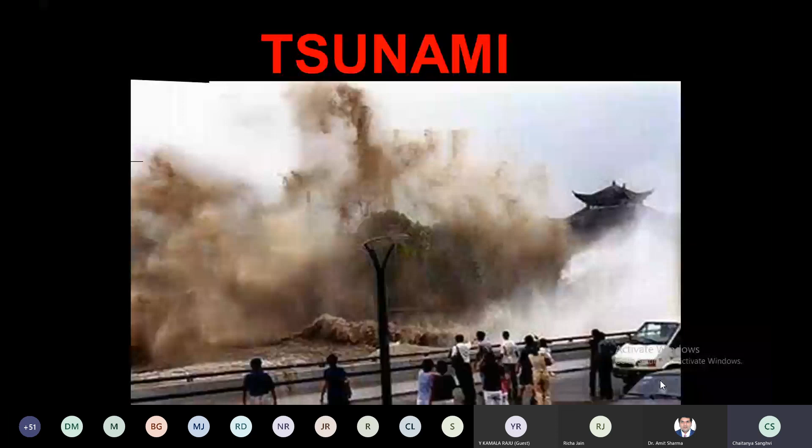This part is already covered in the first one, so I'm not going through this part. We say that earthquake is a man-made disaster, and we have to focus on our buildings. This is very important. Like in each and every earthquake, we see such kind of pictures, right? Deaths.

So these pictures will disturb you as a civil engineer. We don't want to see such kind of pictures. We might not be involved directly, but our civil engineering community is involved, so indirectly we are associated with this. And basically, as a civil engineer, we have to provide a safe habitat.

It's very important for us to provide safe housing or safe structures to all. If you look at the civil engineering profession, it is very unique. Compare our profession with the automobile industry, for example. In automobile industry, if one vehicle is put in the market, before that they conduct thousands of tests, and once they confirm safety and everything, they put that vehicle in the market. Against that, in civil engineering, our product, we put structures without testing. We test materials individually, everything is fine.

But as a whole, we generally never conduct any test on the structure most of the time. So we design our structure on the basis of our assumptions and theories, and then put our structures in reality. You have to feel proud that people are purchasing our houses, our structures. They have faith in you, faith that as a civil engineer, as a structural engineer, you are going to provide safe houses.

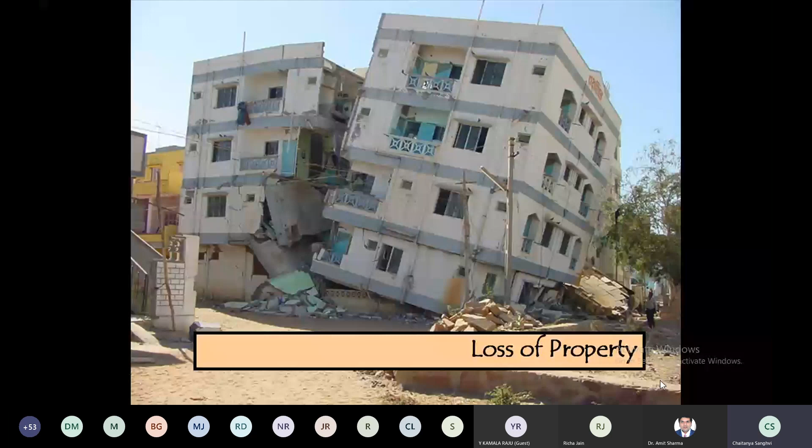No structure should collapse during an earthquake, that is the bottom line. But still, structures are collapsing. That's the reality. We see these structures collapsing, and such kind of pictures we have seen during earthquakes. Here, there's loss of a structural element, like this column is damaged. Right now, still the building survived because we have a lot of redundancy in the system, and the load of this column is transferred to the nearby column, which might help this structure to stand safe.

The health centers—I told you the hospital building in Bhuj was collapsed. These are the schools; almost 12,000 schools were damaged or collapsed during the Bhuj earthquake. 12,000, imagine. All of them were made up of prefabricated RCC units, and the joints were very weak. This was the reason behind it.

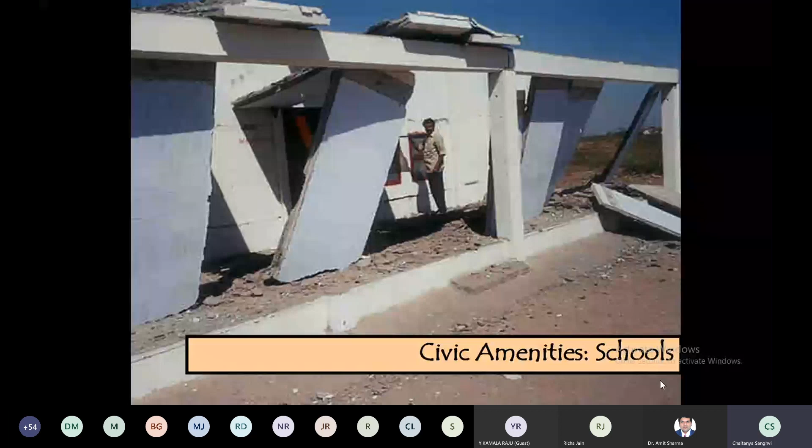The heritage structures are affected. Once a heritage structure is affected, it's very difficult to restore it, so this is a fault. Lifeline structures are affected, bridges or roads. If such things happen, it creates an obstruction in rescue and relief operations, and electric power generally goes down. Urban structures and industrial structures are affected, and the economic loss is very difficult to estimate.

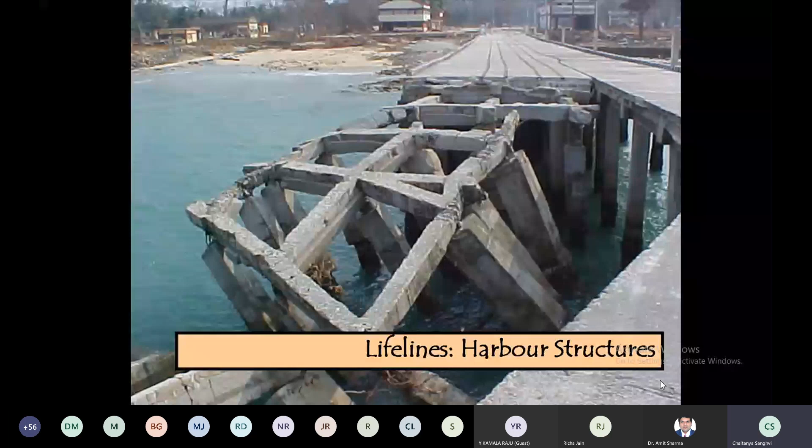We know that 59% of land in India is vulnerable to earthquakes, 8% to cyclones, and 5% to floods. We all know India is resting on the Indo-Australian plate, and the Indo-Australian plate is moving below the Eurasian plate. So the formation of the Himalaya is because of this interplate interaction, known as convergent boundaries. Earlier there was a sea instead of the Himalaya, and now there is a mountain because the two plates are coming close to each other, interacting.

One plate, the Indo-Australian plate, is going below the Eurasian plate, and therefore this is happening. This is a seismic zone map of India, and this is the epicentral map.

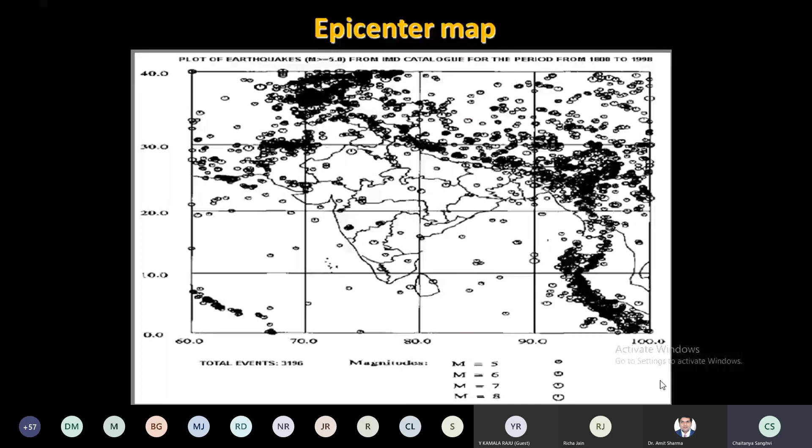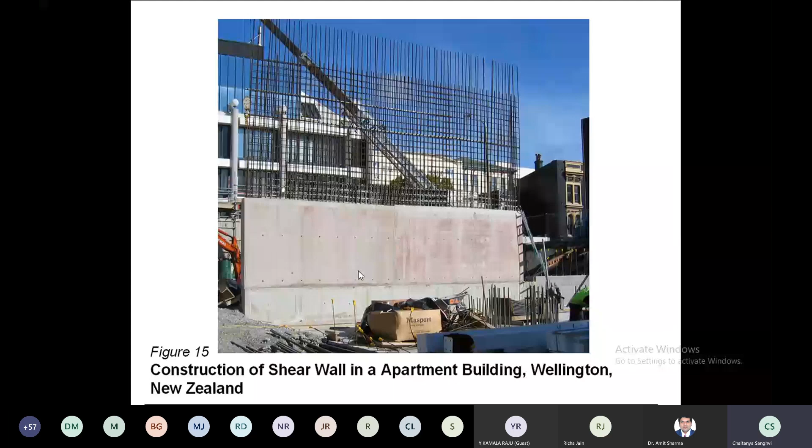This is the shear wall system. The shear wall construction is very easy. Before 2001, people were expecting that shear wall construction is difficult, but it's very easy to incorporate in our structures. You can see this is the MR frame with the shear walls. Generally the moment resisting frame with the shear wall is a good combination, and we have special resisting systems also.

Now we come to the main part. The main part is the need of an earthquake lab. First of all, why is the earthquake lab required? So we have to discuss many things here.

First of all, earthquake is basically a random ground motion, but it's very strong. And the response of your structure to this strong ground motion is also complex. Therefore, we go for static and dynamic analysis. We have a code provision IS 1893/2016 for this.

We have already discussed that earthquake forces are much higher than design forces, and therefore we follow the design philosophy that it is not earthquake proof, but earthquake resistant design.

Earthquake resistant design philosophy means damage is allowed but collapse is not allowed. And after each earthquake, you see there is a refinement in the codal provisions. I told you that IS 1893 part 6 is coming, which is related to base isolation techniques.

So for laboratory testing, we need a physical model and an earthquake simulation, and these two things are required to understand the behavior of structures. The shake table is one means of laboratory testing of the model.

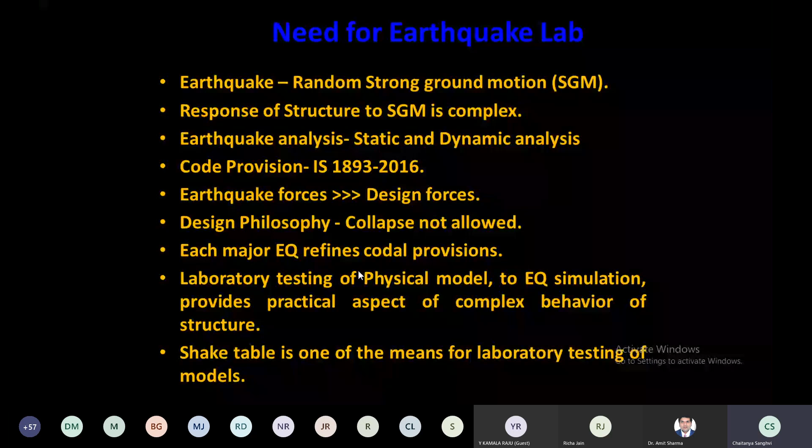Generally various tests are performed on the model. We talk about dynamic tests of models. There are free vibration tests. The free vibration test means giving an initial displacement.

We actually allow the displacement and then allow our structure to move. In the initial velocity test, we give an impact. Forced vibration test means shake table testing, resonance testing, everything comes under this. So we have different types of testing. Even ambient vibration test is also there.

As far as today's presentation is concerned, I'm not going in detail of all types of testing, but I will focus on free vibration test, resonance test, and shake table testing. This is what we are going to discuss today.

Now, to perform the dynamic test, we basically require three things. One is the equipment to provide dynamic force, that is the shake table. The shake table is generally used to provide earthquake motion, so it is also known as the earthquake simulator.

Second, we need a model of our structure, which may be a prototype, a scaled model, or an experimental model. Today we are going to discuss the experimental model. Third, when your structure is going to respond to the motion, we have to capture its response.

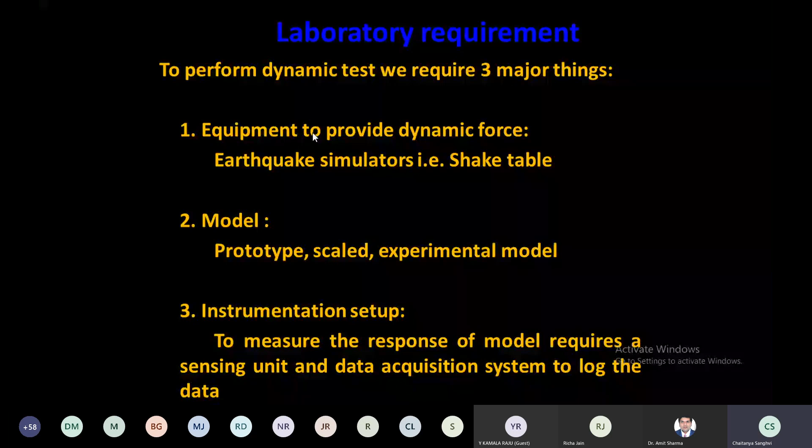So first we talk about the shake table. What is a shake table? The shake table is a laboratory equipment which is capable of reproducing the motion of the ground during an earthquake. This shake table is used to impart the earthquake motion.

It is basically a 6 degree of freedom shake table, which is the most suitable. We want a 6 degree of freedom shake table, meaning it is having shaking in two horizontal directions, vertical direction, as well as rotation in all three directions. So 6 degrees of freedom is required.

We are going to test prototype or scale models in the laboratory, and this shake table helps in investigating both responses, linear elastic or non-linear inelastic deformation. So here we go through certain shake tables which are available worldwide.

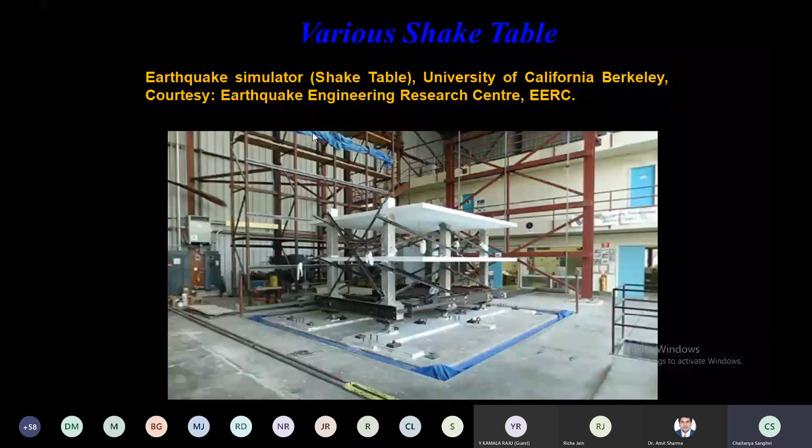If you look at this shake table from University of California Berkeley, the size is 20 feet by 20 feet, and payload capacity is almost 1 lakh pound. It is a servo hydraulic actuator controller, having 8 actuators in horizontal direction and 4 actuators in vertical direction. The maximum acceleration you can impart is 1.5 g.

So this is a 6 degree of freedom shake table. It is having 2 horizontal shaking components, 1 vertical component, and 3 rotations.

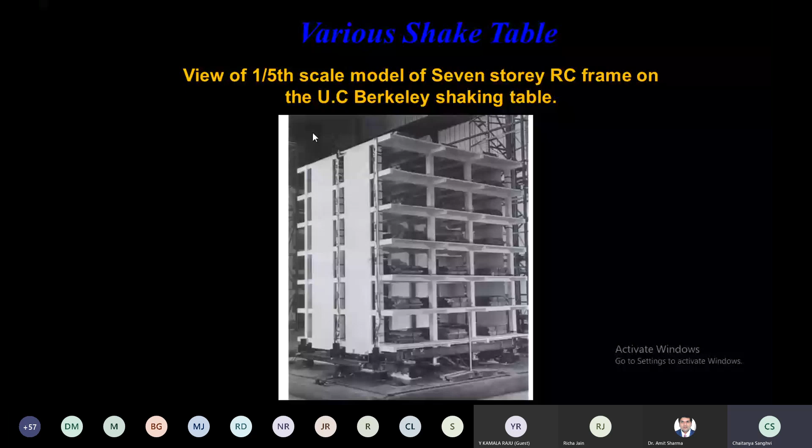So basically a 6 degree of freedom shake table is difficult to build, and the rotational component is important only in certain cases. Otherwise, if you neglect the rotational component, then 3 components remain: two horizontal components and one vertical component.

And I told you that the vertical component means there is shaking in the vertical direction. Now, when there is shaking in the vertical direction, it results in an increase in the axial force in the column. Now, when we design the column, we use a factor of safety of 1.5. So if the column is subjected to 100 kilonewton force, we are designing for 150. It means the column has a reserve strength of 50 kilonewton, and this reserve capacity will take care of the vertical component of the earthquake.

So the vertical component is not important if your structure is located away from the epicenter. What is the predominant action? It is horizontal. So what remains is the horizontal direction, and we require two components basically, in the x direction and in the y direction.

Now it means we have to develop a shake table which shakes the model in both directions. Instead of that, the code says that you test your model in one direction and then test in the other direction. So instead of a biaxial shake table, if you have a uniaxial shake table, you test your model in one direction, then change the orientation of the model and test in the other direction.

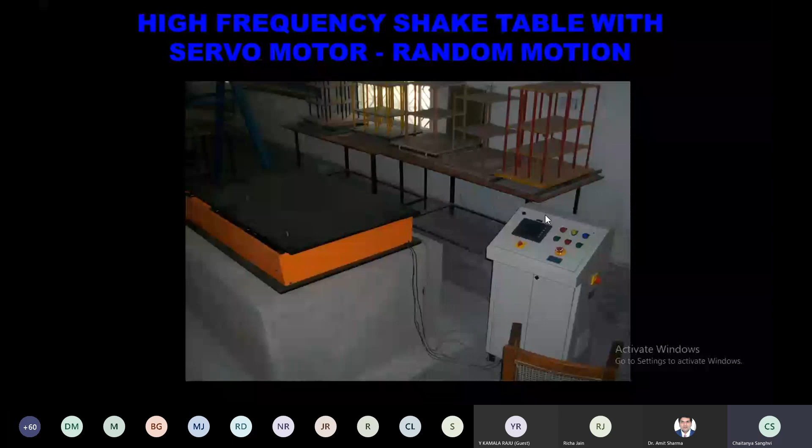So these are the various shake tables available in the lab. This is a uniaxial shake table, where the frequency range is 0 to 25 hertz, payload capacity is 500 kilonewton, and the displacement capacity is 260 mm. We have an instrumentation setup, this is the vibration analyzer, a 16 channel vibration analyzer, meaning you can acquire 16 data at a time.

It means if you put a sensor on one floor or one column, you get the acceleration of that particular column. So 16 records you can have at a time, right? You can record through sensors.

So we have a uniaxial accelerometer and a triaxial accelerometer. Uniaxial means it gives the acceleration in one direction. Triaxial, it will give the acceleration in all three directions.

So for a triaxial sensor, suppose if I'm talking about 16 channels, it means suppose I am having 10 uniaxial sensors, meaning I get 10 records, and I have 2 triaxial, meaning 6 records. So 16 channels will serve this purpose. Or you can have 3 triaxial, giving 9 responses, and the remaining 7 uniaxial sensors you can use as accelerometers to capture the response of your structure, right?

So the first part of the experiment is actually preparing a model. We are testing the model on the shake table. So therefore we have to determine the property of the model first. We have to determine the stiffness of the model. We perform the impact hammer test, free vibration test, and the shake table test. So this is what we are going to do as far as the laboratory experiment is concerned.

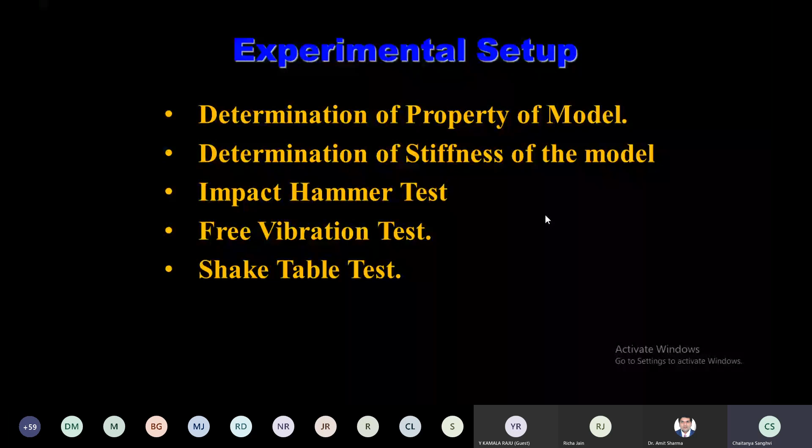Suppose this is a frame, right? Now this frame is a rigid frame. So what we do here, you can see this is a 2-story model. So this is a 2-story model, and what we are doing is locking one floor, and we apply the force here, at this level. And then we record the deformation, so we get the actual stiffness of the structure, right?

So what actually we do? We do like this. Basically, it's a 2-story structure, story 1 and story 2. So what we do here is apply the force on the first story, and we get the stiffness of the first story. Then we lock the first story and apply the load on the second story, and we get the stiffness of the second story, right?

Practically, we get this actual stiffness. This stiffness we are calculating in the laboratory, on ground. We are measuring this, right? So you get the exact idea what is the stiffness of your model. And you can also verify the stiffness with the theoretical calculation, and you can also have an idea of what the differences in the stiffnesses are and why the differences are there. So that is to be there.

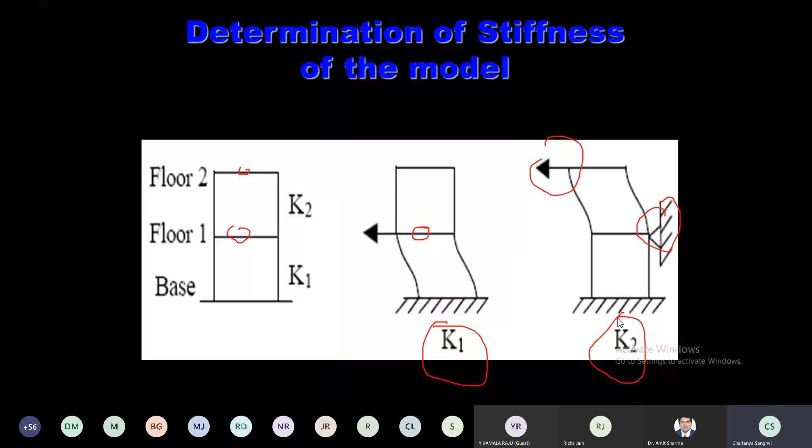So these are some of the things, and then basically we perform the free vibration test. What is a free vibration test? Basically, free vibration means your structure is there, and then we allow the displacement, and then we are leaving it. Now your structure is basically flexible, it possesses certain stiffness, certain flexibility. So suppose if I am stretching the structure and then relieving it, then the structure will vibrate. How will the structure vibrate? That we'll see in this video.

You can say whether it's visible or not. Yes, sir, you can see this. Is it visible? Yes, sir. Now you see this is basically a three-story model, and what you are doing is disturbing it, you are just stretching it, right? So now because your structure is flexible, it will vibrate.

Now you can see here, sensors are placed at every level. It will capture the acceleration of the slab, right? So we are capturing the response of our structure.

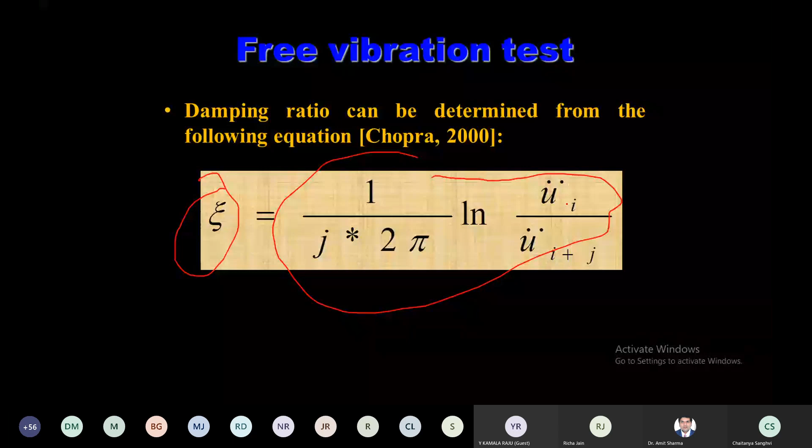So here, this is the expression in which we are calculating the amount of damping present. This is the equation given in the book of A.K. Chopra, and we can refer to this to calculate the damping. So again, one more time we will see the video and you get a clear idea of what exactly we are doing. It's a free vibration test. Free vibration test means only initial disturbance is there, and later on we are not disturbing the system. This is a sensor.

This is on the top. It is a sensor, right? The sensor is placed, and it will measure the acceleration in the direction. So sensors are placed on the shake table on all the floors.

So when we disturb the system, we are applying only displacement and relieving. So it is a free vibration test. What is the free vibration test? Only initial disturbance is there, and then the system will vibrate on its own elastic property, right?

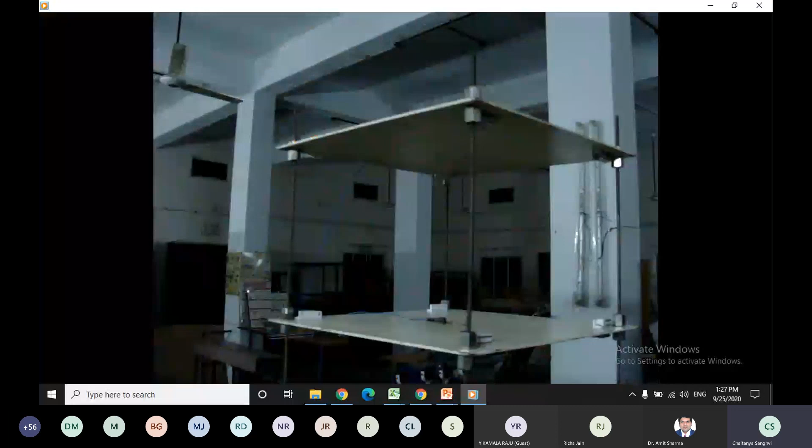So this is the free vibration test we are going to perform. The second is the impact hammer test. The impact hammer test means it is the initial velocity test. Initial velocity. You see, this is basically an impact hammer.

This is the hammer, right? And on the tip here the sensor is there. This is the sensor, right? Now this you can connect with the wire here. You can connect here, right? So when you apply the impact using this hammer, then the sensor will sense how much energy you have applied.

It is recorded by this hammer, and we apply this energy to our model, then the model will vibrate. So it is known as an impact hammer test, right?

So you can see here, this is a hammer, and here the impact is given. And you see, this impact is very minor, right? And even though it is minor, our sensors are sensitive, so they will capture all the data, right?

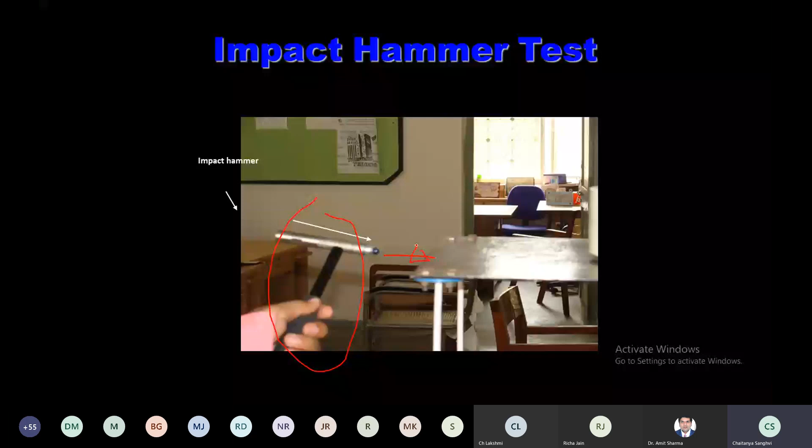And you can see here how we perform the impact hammer test. Now this is the simple model, and the impact is given. Now you can see this spring mass system is vibrating, right? So this data is captured in the software.

This is the impact given, this is the energy given. At the same time, the corresponding displacement is observed. If you apply more energy, then...

Again, I'm repeating this impact hammer test. If you apply more energy, then the response will be larger. That's all, right? So this way we are performing the impact hammer test.

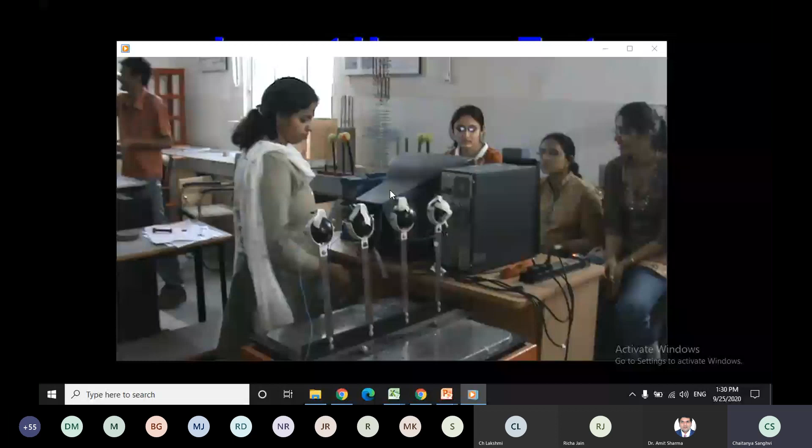This is known as the initial velocity test. Earlier it was the initial displacement test, now it is the initial velocity test. Both are free vibration tests. We are only going for the initial displacement or initial velocity, that's all. So only initial disturbance is there, that's why it is known as a free vibration test.

So the difference between free vibration and forced vibration is: in free vibration only initial disturbance is there. In forced vibration, during vibration we are continuously disturbing, we are applying energy. That is the forced vibration test. So here we are not performing forced vibration, this is the free vibration test.

Now we go to the third test, the shake table test. Here we are mounting our models on a shake table, and the shake table will be applied the motion, and then we record the response of our structure. We determine the natural frequency of vibration, acceleration, and natural period, everything from the frequency response curve, right?

So now we go to the single story building, right? Single story building means this is a single story building having a single slab. The single slab has a very heavy mass at one location. So if the earthquake force acts in the horizontal direction, a heavy mass is located here at this slab level, right?

Heavy mass is there because the slab is very heavy. And what is earthquake force? Earthquake force is mass into acceleration. As it is mass into acceleration, it generates a large force at this particular level. We know masses are present elsewhere too, but they are negligible compared to the mass of the slab. So we say it is a single story building having a single degree of freedom system, where this heavy mass vibrates in the horizontal direction.

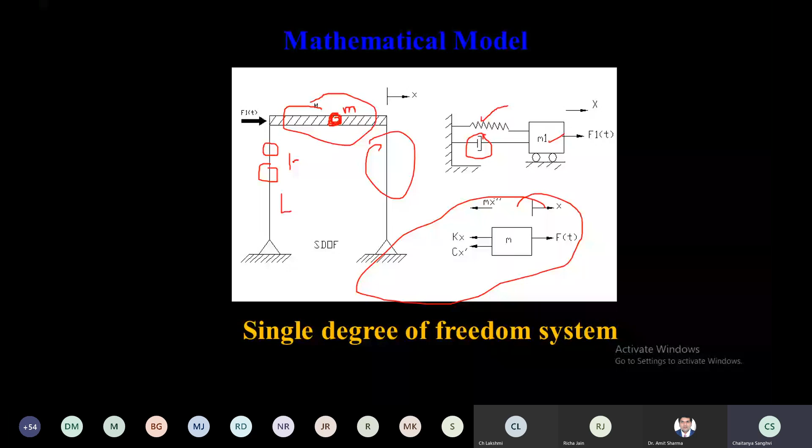And the fourth parameter is the mass. So basically we have prepared different models to understand the behavior. The most basic model is the spring mass model. We say this is the slab where the heavy mass is located, supported on columns. The column has certain stiffness, so we say it has certain stiffness and certain mass.

So which parameters do we have to consider? We consider that the value of E will change if we use a different material, because frequency depends on K and M, and K depends on E, I, and L. So if we vary E, I, L, or mass, we can vary these four parameters, and we try to study one by one what happens if we change each parameter.

So we are changing these parameters. We change the material, so here we're talking about E. What is the effect of E? Then if we change the height, that means L is changing here, and what is the effect on response? Here we are talking about a change in the mass. Here we talk about the thickness, meaning we are talking about the value of I, changing the value of I.

You can correlate: suppose I'm talking about a masonry structure, the value of E is different. If I'm talking about an RCC structure, the value of E is different. So which type of structure are we talking about? E will change accordingly. Height: suppose my drawing room has double height and the remaining rooms have single height. If double height is there, the behavior of that column is different compared to the single height column, because the stiffness will change.

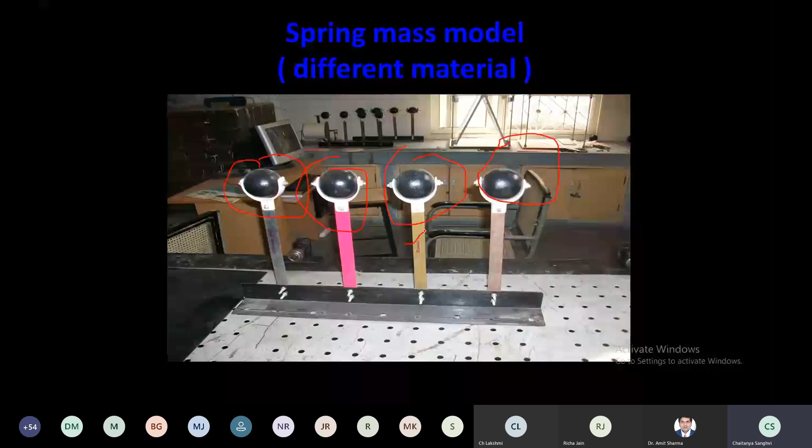So then we perform a free vibration test. When we perform a free vibration test, you get the result. When you perform a shake table test, you get the difference, right? So we have to perform all the tests. First, we perform a free vibration test, displacement test. Then we go for the impact hammer test. Then we perform the shake table test.

So we can have a stainless steel, we have a flexi ply, right? So here we can see the spring mass system. You see what we are doing? We are putting all the four models on a single shake table, right?

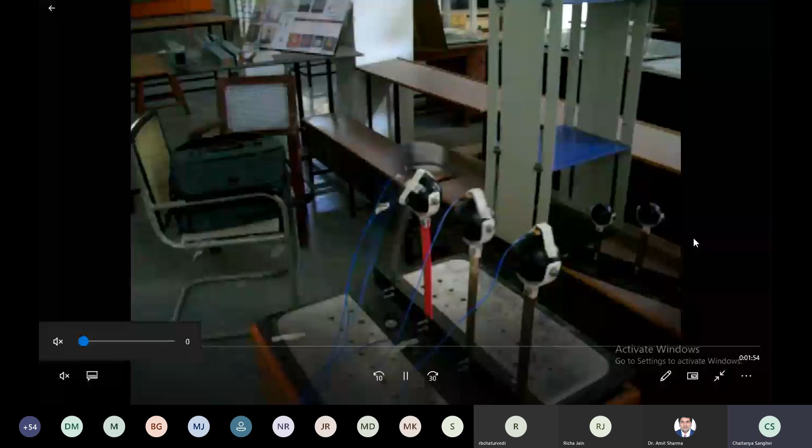Now here you can see there are basically four spring mass models. One is with steel, another is flexi ply. Now we apply a certain frequency.

Now you see all 4 models are given the same frequency, but one is vibrating more. Now the frequency is increased. When the frequency is increased, what is happening? Look at the behavior. The next model is vibrating, right? It means the frequency of this model is higher than the previous one, and it is vibrating.

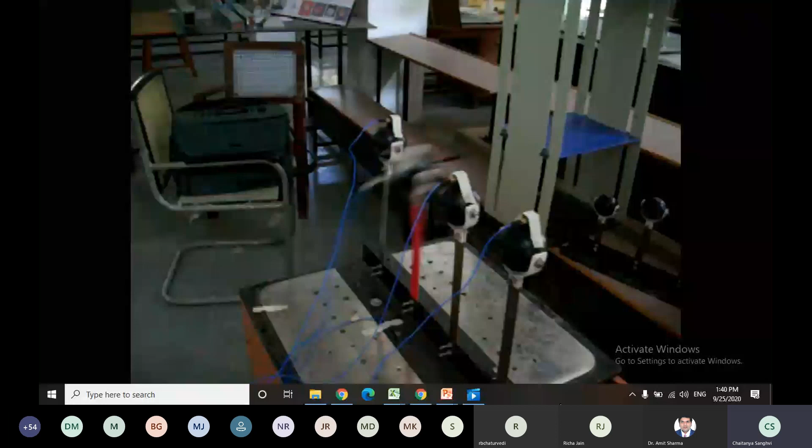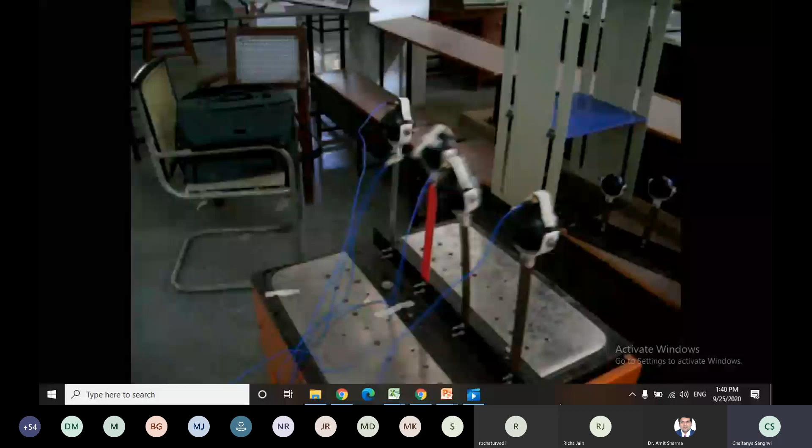Then if you are still increasing the shaking frequency, you see what happens. When we increase the frequency, the other 3 are not responding, but the third one is responding. First, second, and fourth are not responding, but the third one is responding, right? It means the frequency of this model is close to the frequency of shaking. So this is the reason for resonance.

And here the sensors are placed. You see, the sensor is on the top. A uniaxial sensor is there on top, and it measures the acceleration.

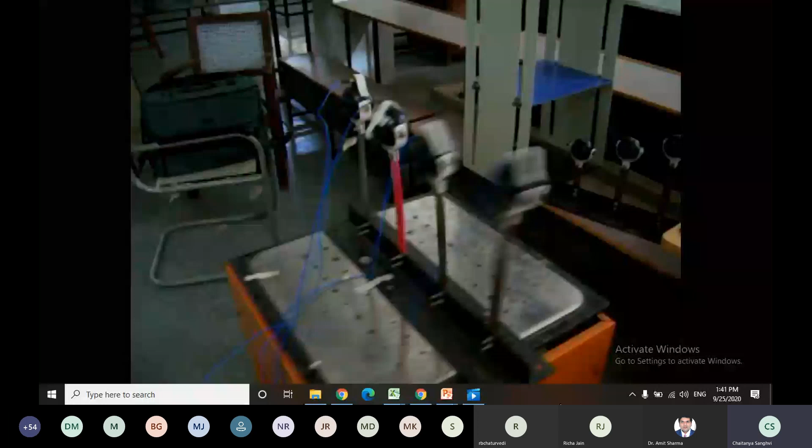Now still I am increasing the frequency. Just look at this again. If I increase the frequency, what is happening? Now the first 3 are not responding, the last one is responding, right? It means the frequency is close to this particular model.

So sometimes the question will arise, which building will be affected during an earthquake. You cannot say which building will be affected. It depends on the frequency of your structure and the frequency carried by the earthquake. This is very important. If a structure has a frequency of 5 hertz, and the earthquake carries 5 hertz frequency, that structure will vibrate more. But if the earthquake carries 10 hertz frequency, then 5 hertz structures will not be affected. So you can only say your structure will be affected based on the frequency of your structure as well as the frequency of the earthquake shaking. If both match, a larger response will occur.

So here, this is the spring mass model we can have. This is a basic model where you can study the response.

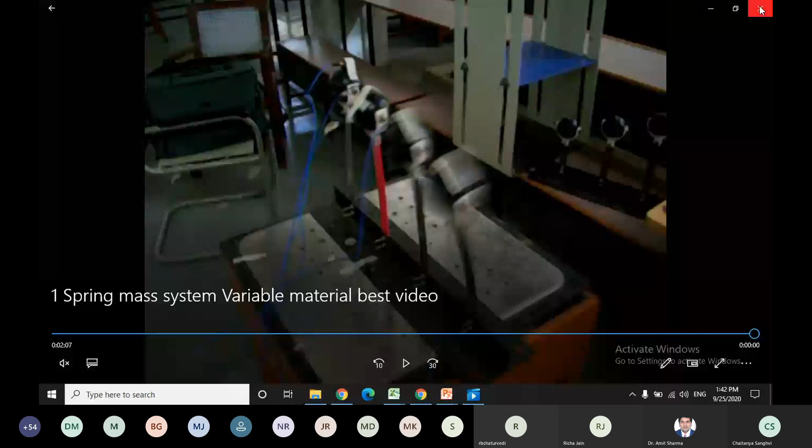So what exactly do we do? We have mild steel, stainless steel, flexi ply, brass specimens, and we use a vibration analyzer to test them.

We calculate the frequency. What is the frequency for mild steel? When we model this in STAAD software, we got 3.181, and theoretically it was 3.4. You can see these frequencies are close enough. This variation may be because of the end condition and other factors.

If you look at the stainless steel, and perform the experiment correctly, you get 1.15. When we model this in STAAD, it is 1.5, and theoretically it is 1.52. I know the mass, stiffness, all the geometric and material data, so I can calculate it theoretically also.

So you can compare this, and then you have proper satisfaction that what I have tested is correct and it matches with the theoretical values.

Then the next model is variable height. Sometimes we say my column height is 10 feet, for example. Or you can say the height of the column is 12 feet, 15 feet, or 20 feet, something like this.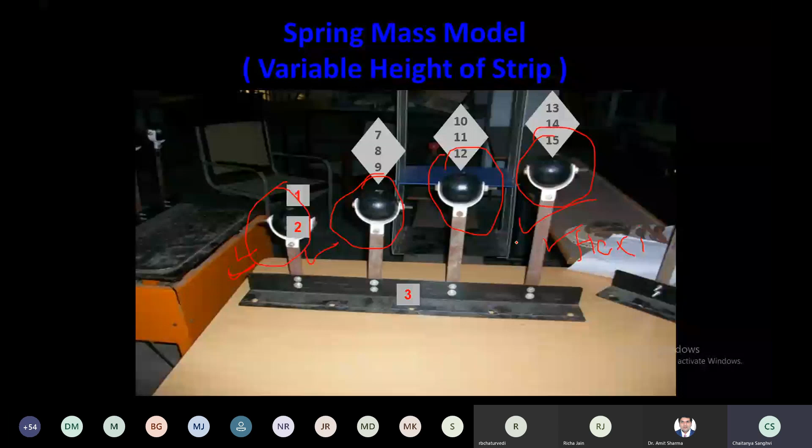Again you can do the same thing: analyzer testing results, then STAAD and theoretical comparison. Almost you get the same type of results, if we perform it correctly.

Then we have different masses, you can see here. This one has the least mass. Then a collar is attached here, and mass is added. Then mass is added here again, so this one has the maximum mass, while this one has the least mass.

So what is the frequency? Frequency is the square root of k by m. If this one has the least mass, frequency is high, and this one has higher mass, so frequency is less. This is what you can conclude.

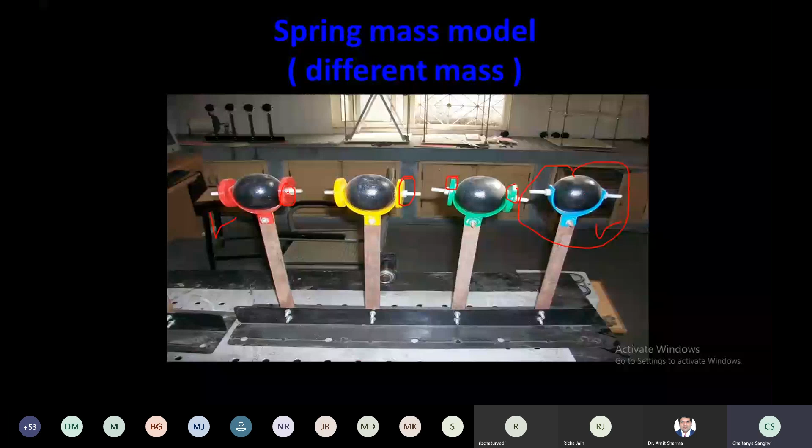Again the same thing can be performed for a spring mass model of variable thickness. So we can perform the test.

Now we go to the next part. Here we are talking about a multi-story building having three floors, 1, 2, and 3. So there is a 3-story structure. It means it is like this: this is the first floor, second floor, and this is the third floor.

So we have 3 floors, and again we test on the shake table. What is going to happen? When we model it in the software, we get different mode shapes.

Mode shape means for a certain lowest frequency we get this type of shape, then for a higher frequency we get this shape, and for the next higher frequency we get this shape. These shapes are known as mode shapes.

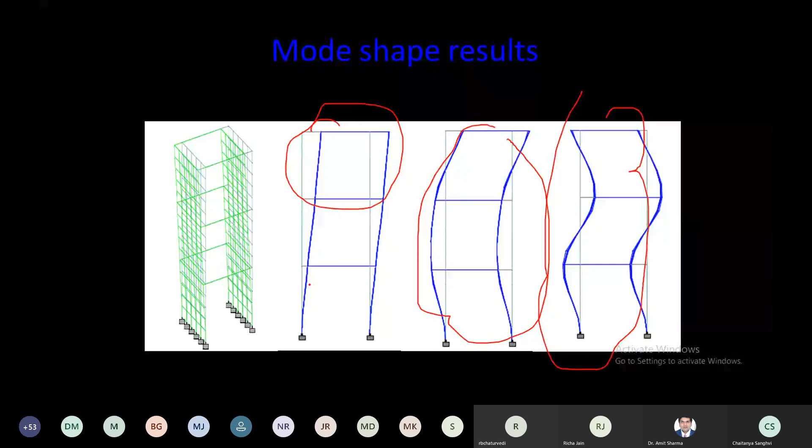You can see here, we will perform the test here, and here we have the lowest frequency. Remember, this is having the lowest frequency. Then here you have higher frequency, and here you have the highest frequency.

So when we perform a test on the shake table, what happens? You can see it is quite a flexible system. We put a sensor at the top, all 3 levels, and at the bottom on the shake table. You can see the shape is something different at lower frequency. Now, when the frequency is increased, the shape is changed. So the response of your structure depends on which type of shaking frequency the building is subjected to.

Now you can see the response has quite subsided. Let me repeat, just look at the model again. Here the lowest frequency is applied as the shaking frequency, and you can see the response. This is quite flexible, so the response is very high.

Now if I increase the frequency, what happens? The frequency of the structure and the frequency of the table are not matching, so the response comes down. Let me repeat this, you have to understand this.

What is resonance? This is a low frequency model. So when I'm testing this at the lowest frequency, you have a larger response. It means it comes into resonance.

And when I increase the frequency, then it crosses the frequency of the structure. So now the response is reduced, right? So therefore you have to be very careful.

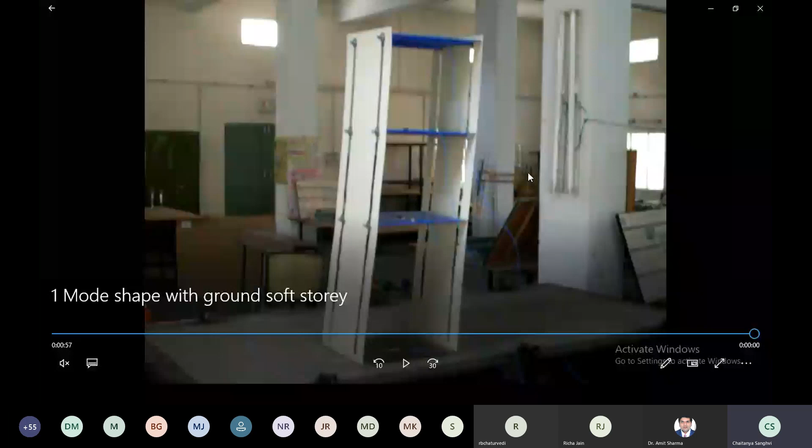You see, when we're talking about low-rise structures, the frequency is high, and when we're talking about high-rise structures, the frequency is less, right? When you calculate the frequency of a low-rise structure, it is always high, and the frequency of a high-rise structure is always low. Now, when a low frequency earthquake comes, then the high-rise structure will be affected, and when a high frequency earthquake comes, then the low-rise building will be affected. You cannot simply say the high-rise structure will be affected, right? You get my point, what I'm saying? Yes or no?

Yes, sir. So again, the response of your structure depends on what frequency the earthquake carries, right? If the earthquake carries the frequency that your structure is having, then a larger response will be there.

So that's why I'm saying that during the 2001 Bhuj earthquake, in Ahmedabad, 128 buildings which were ground plus 4 story collapsed, and only 2 buildings which were ground plus 10 story collapsed. Now the question will arise, why is this happening? There are many reasons, quality of construction and many other issues, but one of the reasons was the frequency of the earthquake was little close to the ground plus 4 story structure as compared to the ground plus 10 story structure. I'm not saying resonance was there - no, resonance was not there, frequency is continuously changing - but the frequency was a little close to the ground plus 4 story structure, right?

I'm giving you the example of the 1985 Mexico City earthquake. What happened? A very low frequency earthquake was there, very low frequency earthquake. And in Mexico, almost 7 to 15 story buildings were affected a lot. And when engineers analyzed why this 7 to 15 story range was affected - because it was a very low frequency earthquake - and why these buildings were affected...

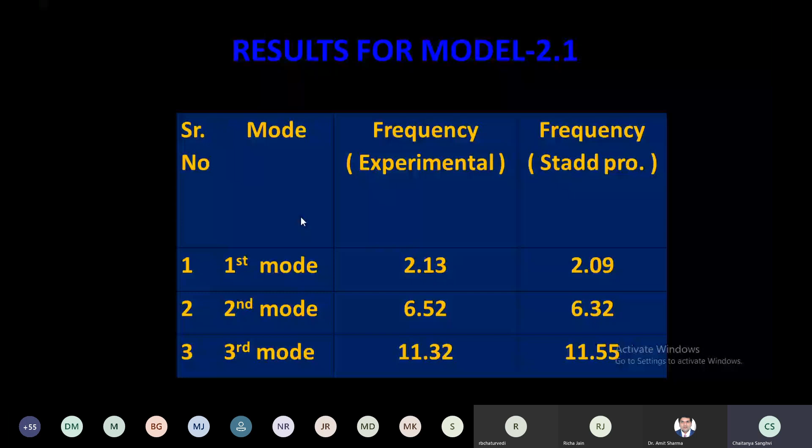Now, this is some dynamics part we have discussed, but now let's talk about reality. We are talking about structures which are collapsing during the earthquake, maybe open ground story or soft story structures, with vertical irregularity and stiffness irregularities. We will see this.

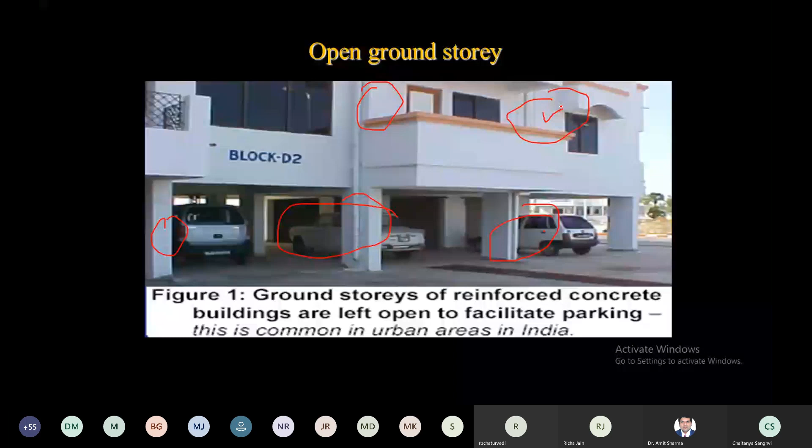What is open ground story? We generally provide parking at the ground story, and the people start living on the first floor. So what is happening on the ground story? You have only columns, while on the first story you have columns plus walls. So which part is stiff? The ground floor is flexible, and the first story is stiff. Here you can see only columns are there on the ground story, but on the first story you have columns plus walls.

Again you can see, this is generally the system we provide in India: a ground story where only columns are there, and on the first story you have walls also. So the ground story is flexible, upper story is stiff. The soft story means the story whose stiffness is less than the upper story—it is known as the soft story. In the previous code, it was mentioned that if the stiffness of any story is less than 70% of the stiffness of the upper story, it is a soft story. It was defined before, but now in the new code it was removed.

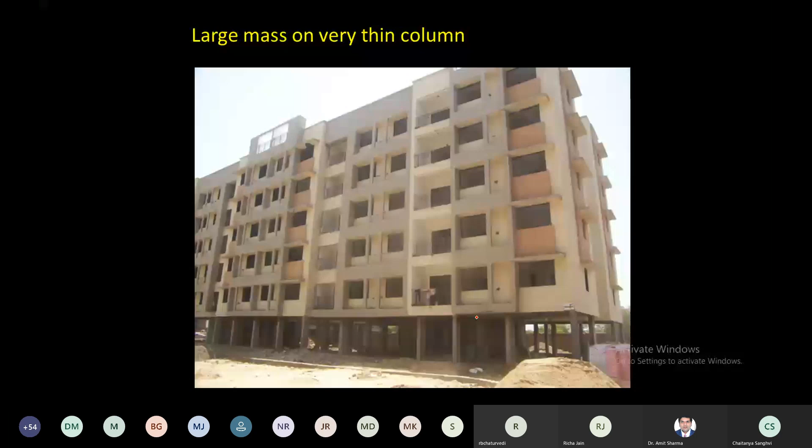Here again you can see these are soft stories. Now here you have car parking, the space for car parking is there. This is a ground story meant for parking only. So what is going to happen? Here the ground story is flexible—maximum deformation is on the ground story, and the upper portion is very stiff, so it moves as a whole. So the whole building behaves as an inverted pendulum. We can say this mass is a single mass vibrating on these columns.

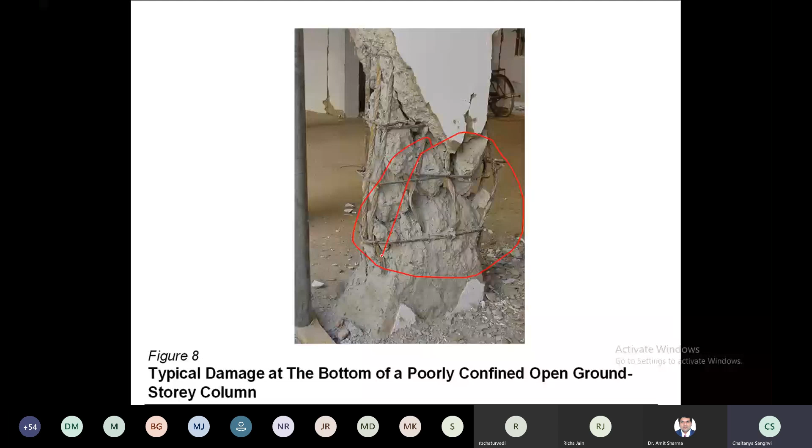Because it is soft, you can see what is happening here, because of this reason. Here we have 128 buildings, ground plus 4-story, collapsed. Out of these, almost 90% of buildings collapsed due to this soft story effect, because of the parking on the ground story. You can see these columns collapsed on the ground story, but the upper part, as such, has no damage—damage is there, but because of collapse of the lower story. Ground floor columns collapsed, but almost nothing happened to the upper part. So we have to pay more attention to such kind of problems.

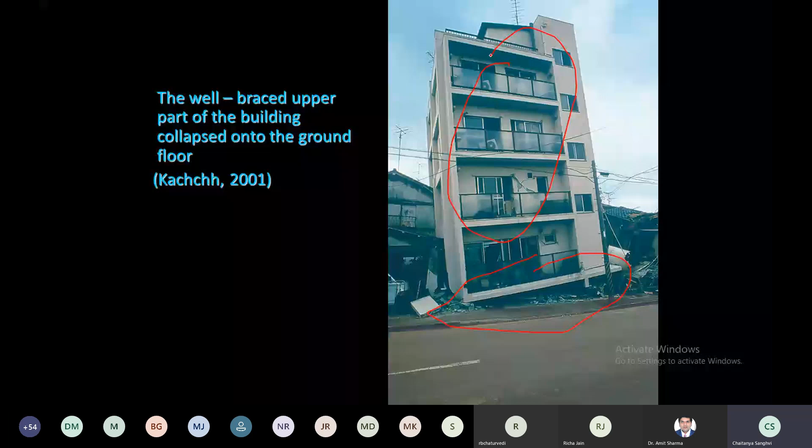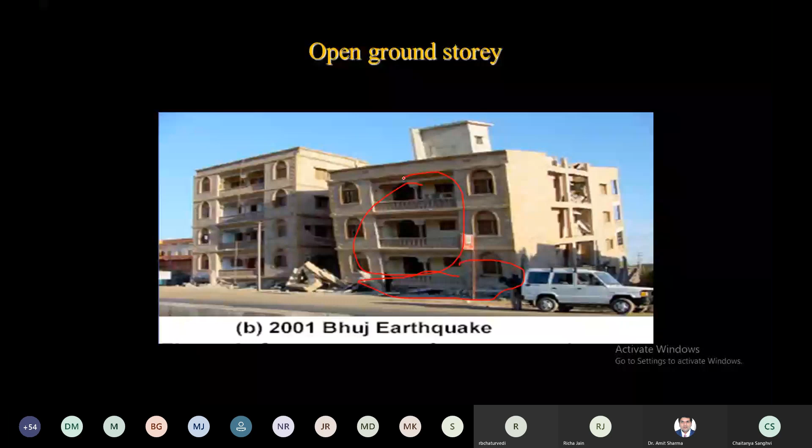So now we will see what is the soft story effect.

I think the orientation is something wrong. Orientation is... how to make it a 90-degree rotation? Is anybody doing it?

Sir, yes, I think the video is taken with the help of a mobile. How to see? Okay, I think this video...

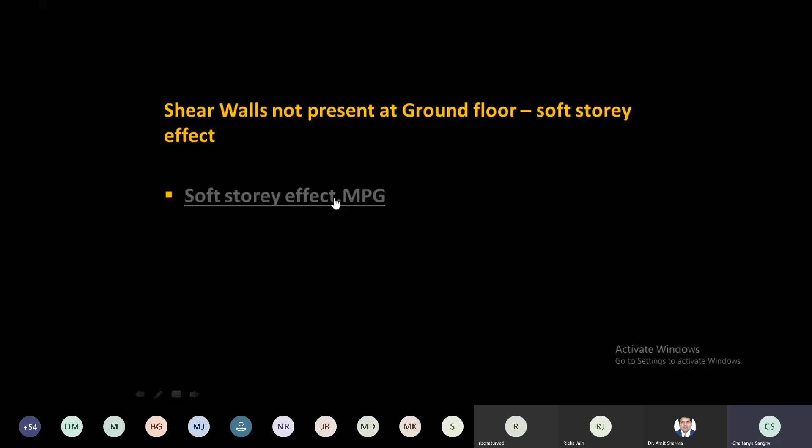If you can see, just look at this. You see the ground here. On the ground story there is no wall, and here you can see wall is there. So it is like an open ground story structure, right? And now what is the behavior? You can see the upper part is moved as a rigid body, and the lower part where the deformation is there.

I think the next video will be more. I'm not able to rotate it right now, that is a problem. Rotation is possible, but I think options are not here right now.

Okay, we are not wasting time in that, but I think the next video is the soft storey failure. Now you observe this, this is very important. You see, again, here the walls are there. On the ground story there is no wall, right? Just look at this, and here the students are also very excited. Look at this, here you can see the failure also. So this is a soft storey model.

And we are applying the shaking frequency. Now you look at the upper part, it is moving as a rigid body, and the deformation is at the ground story, right?

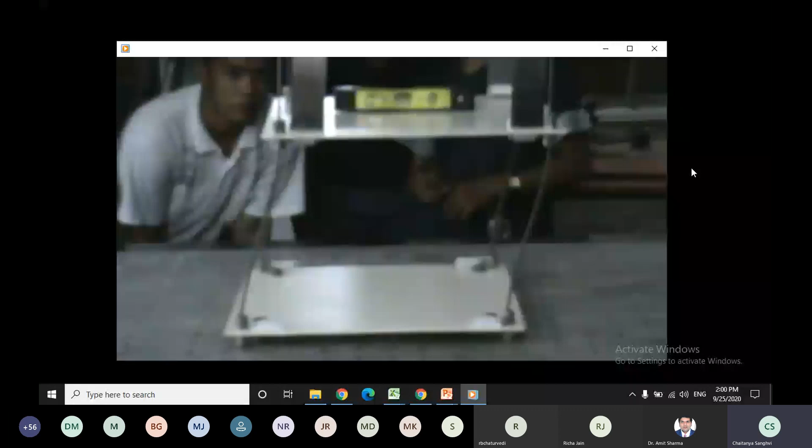Look at carefully, look at carefully now. Right, upper part is moving like a rigid body, and in the ground story, what is happening? On the ground story, yes, larger deformation, and this is gone. You can see this is collapsed, right? This is broken, right? So this is the soft storey failure, and a lot of energy. When you touch this part, I think a lot of heat is generated.

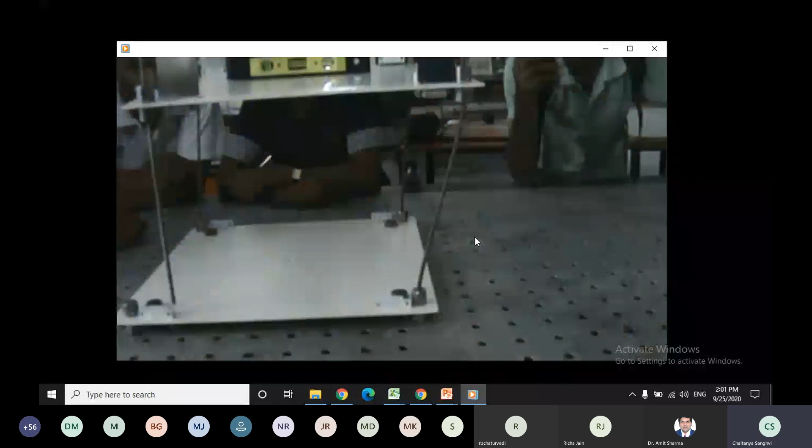It is too hot, right? The same thing is happening with the other structures also. You see the deformation is observed in the ground story. So my request is that avoid the soft storey, avoid the parking, if you want to go for it, with the proper design considerations, right? So that is to be required.

Okay, again, I think you have to see it again so you can appreciate the soft storey, because 90% of buildings in the Bhuj earthquake collapsed due to this reason, right? And in India we are still following this practice without proper design considerations. If the proper design considerations are there, fine, nothing is wrong, you can also design such kind of structures, but you have to pay attention to it, that is required.

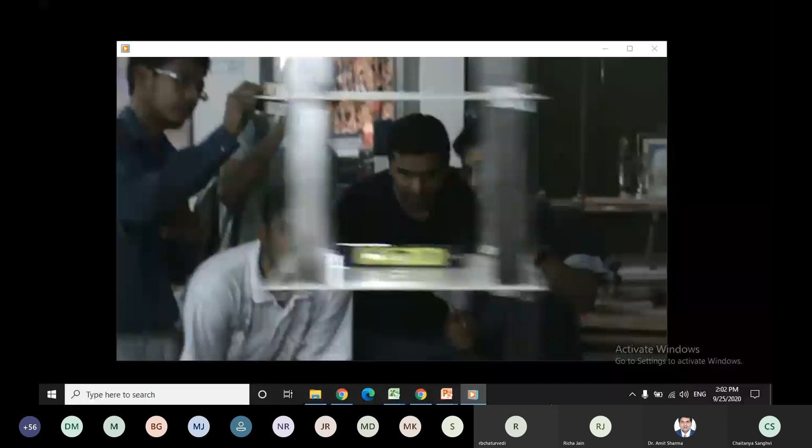Look at this, right? Larger deformation on the ground story. Upper story, almost no deformation, because of stiffness, high stiffness. Now look at the failure. Look at the failure now. Look at the failure, larger deformation, and it is gone, right? So I think this is sufficient.

Okay, so we move ahead with the next part. So here you can see we have calculated the peak acceleration, displacement.

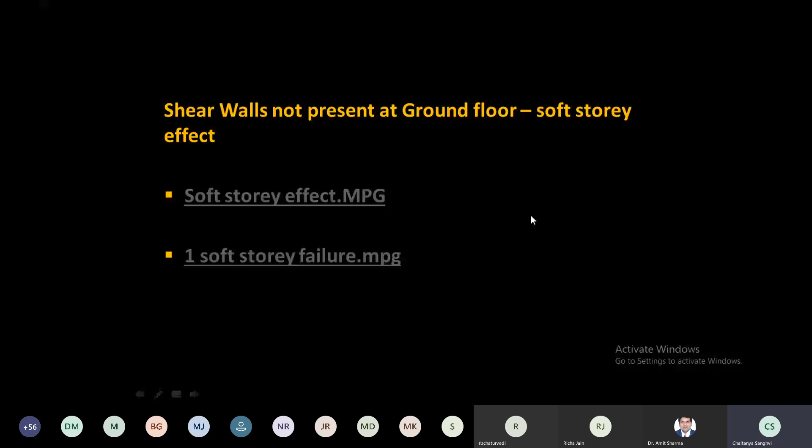So displacements are very high, and you see our concrete structures, our steel structures have limited deformability. If it deforms more than a certain limit, it will collapse.

We sometimes have the middle story to be soft. Middle story means, sometimes we need an auditorium on the 6th floor, so for the auditorium we remove the column. What happens? Almighty nature has found out the weakness within 2 minutes. 2 minutes, the weakness is found out, and the whole structure came down, right? You can see here, this is...

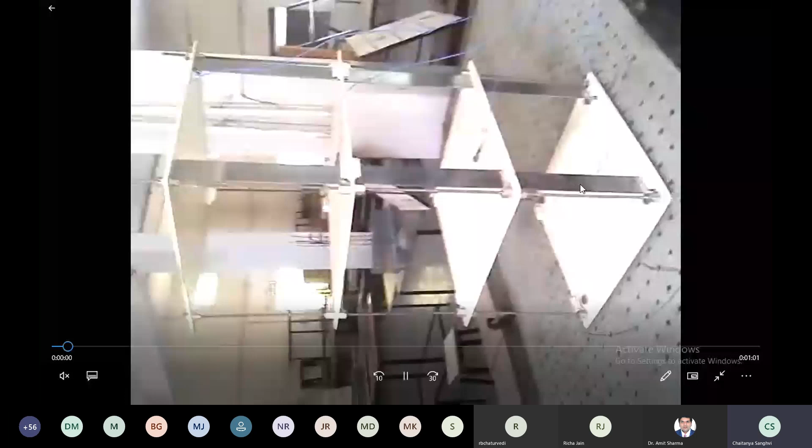So when you go for the asymmetric shear wall, asymmetric means we are providing a shear wall on one side, right? Generally what is happening, when you are a structural engineer, a civil engineer, you know that we have to deal with the architect, and architects are saying that the front part of the structure should look good, and therefore you cannot provide a shear wall in the front. You can provide the shear wall on the back side, right? So we place the shear wall on the back side. For normal circumstances, it is fine.

But suppose during an earthquake, what is happening? You can see here during earthquake it induces a torsion. Just look at this, one part is stiff, another is flexible. So one part will move more, the stiff part will move less, and you can see how your structure is vibrating. Again, a problem of rotation is there.

This is the response, and this is the most important part. Here you get the acceleration, which is abruptly changing. You can see the peak acceleration, and the acceleration you are getting in both directions, not just one direction. We are shaking in one direction, but you get acceleration in both directions. This happens when your structure is unsymmetrical, causing torsion, and this is what you observe.

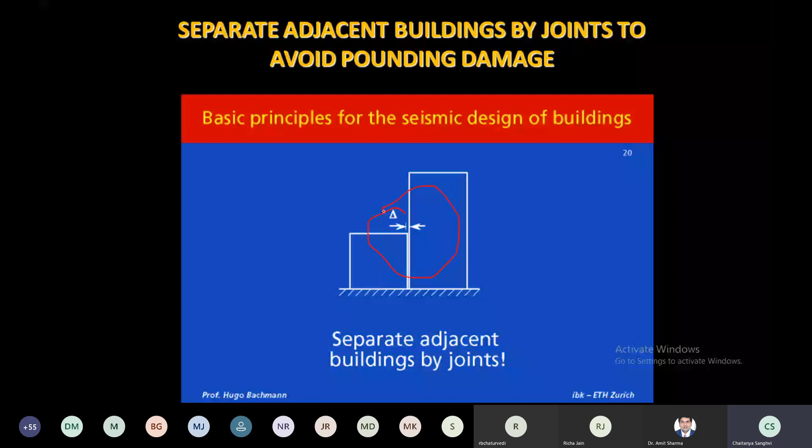The next topic is pounding. Pounding means when two structures are close to each other, they will hit each other and have an impact between them. So what happens? This slab will hit this column, and the result is collapse. You can see here, this structure has collapsed.

What is the solution then? The solution is not simply making your structure stronger than the adjacent structure. We have to find the real solution to this problem.

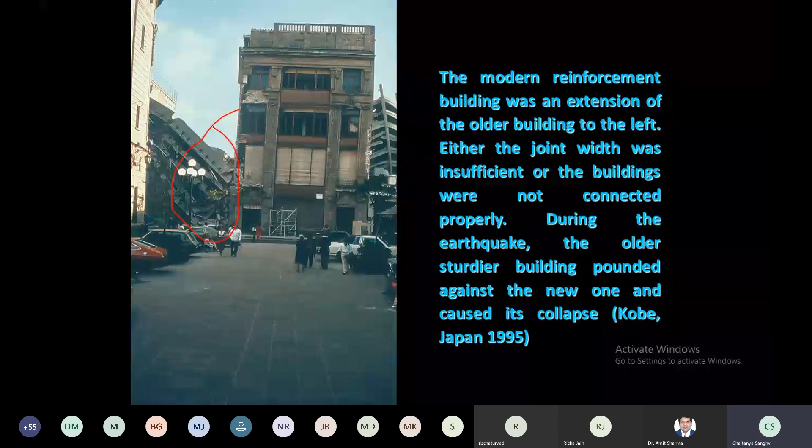Here you can see the top part collapses because of the impact. We have designed our structure for earthquake forces, but we have not designed for this additional impact force. This pounding occurs during earthquakes because it comes in the lateral direction. Earthquake shakes your building laterally, and therefore this impact comes into picture. You can see this collapse here.

So we have a model showing pounding of slab with column, and pounding of slab with slab. If we have these two structures on a shake table, this slab will hit this column - that is slab to column pounding. And here, this slab will impact that slab - that is slab to slab pounding. The solution is to provide a separation gap between them.

So here we have another video where we perform the test. Let me explain this first. The height of this model is high, so its frequency is low, and the height of this slab is less, so its frequency is high. So both have different frequencies.

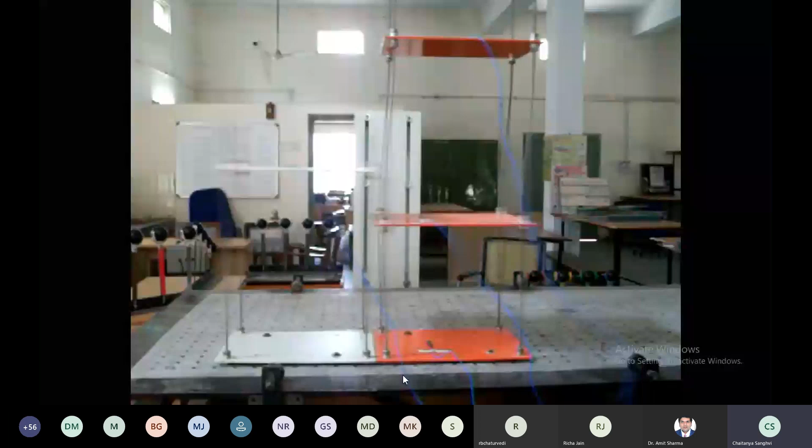Now look at this. When the same earthquake motion is applied, the slab is hitting the column. Even if this column is designed properly for the earthquake force, this additional impact will cause damage. So you have to avoid this pounding by providing a separation gap. Remember, that is required.

You can see this is the impact, and a large sound is created. If I play you the sound, it is very loud. So this pounding must be avoided. Now we talk about slab to slab pounding.

Again, the problem of rotation is here. Here both the slabs are at the same level, and we can see what is happening.

This pounding is having a larger impact. When the impact comes, the force will become double - we understand that in structural analysis. It will hit with double the force as compared to gradually applied force. So we have to avoid such things in real life.

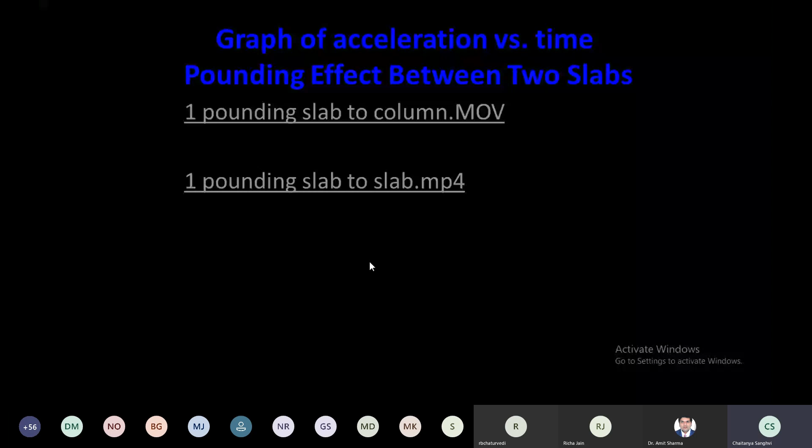And this is the response we are getting. Through the analyzer we get the response, and you see when the impact takes place, the acceleration is also increased. This is very important - the maximum force here comes out to be the additional force you have, and we have not designed for this additional force, so the structure may collapse.

You can see here when the impact comes, you have a larger acceleration. These are the peaks because of the impact, and larger acceleration will be observed. This should not happen in real life - this is to be addressed properly.

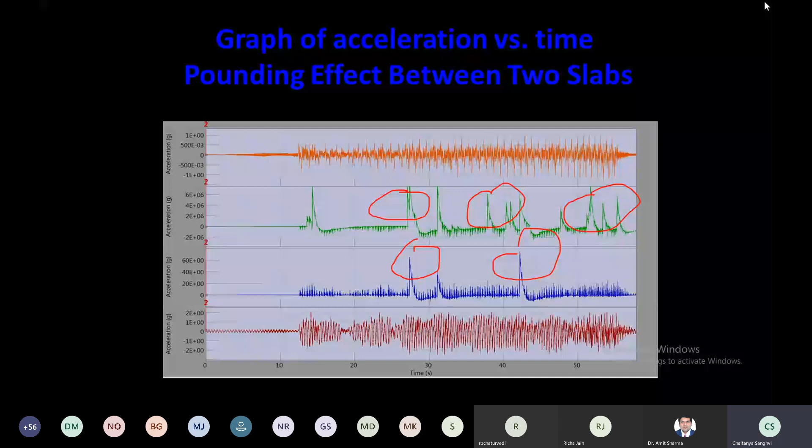Here you can see these are the results, and again the maximum force is an additional force applied, for which your columns are not designed, so therefore damage or collapse is observed.

So the solution is to provide the gap. If you provide the gap, you have to design it properly. 0.4% drift is allowed as per the Indian code, and the gap should be 0.004h into R, the response factor - that's R. So that should be the gap, 0.02h for a ductile building having R equal to 5. So proper estimate of the gap is required, and provide a separation gap.

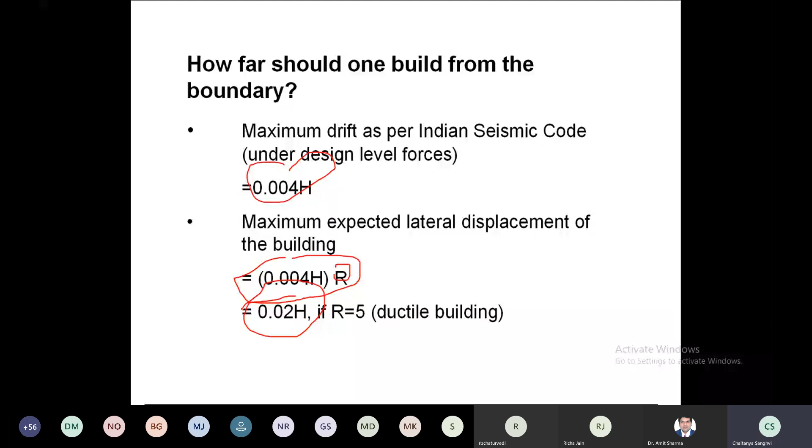Then we talk about buildings we sometimes come across - L-shaped, C-shaped, H-shaped buildings. Are they good, or okay, or not good? We have to look at this. Under normal dead load and live load, with no earthquake or wind, that is fine - these buildings perform better. We have such configurations.

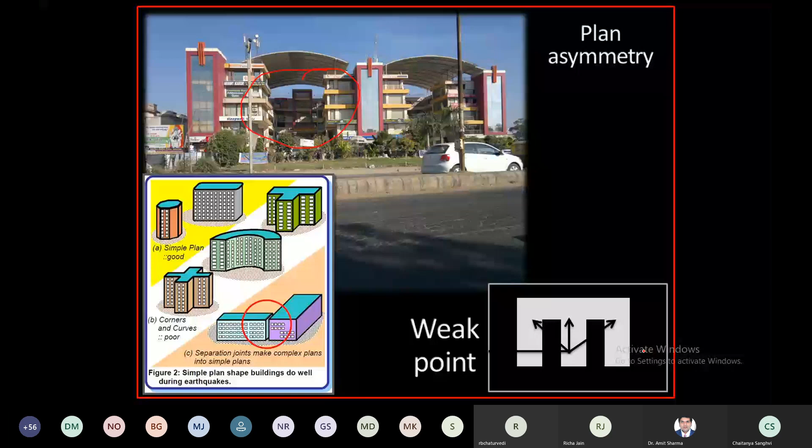You look at this - we have C-shaped buildings, L-shaped buildings. This is an L-shaped building, it will be like this. We have again C-shaped buildings, this is also a C-shaped building, this is an L-shaped building. All these buildings are located in Ahmedabad, I am saying.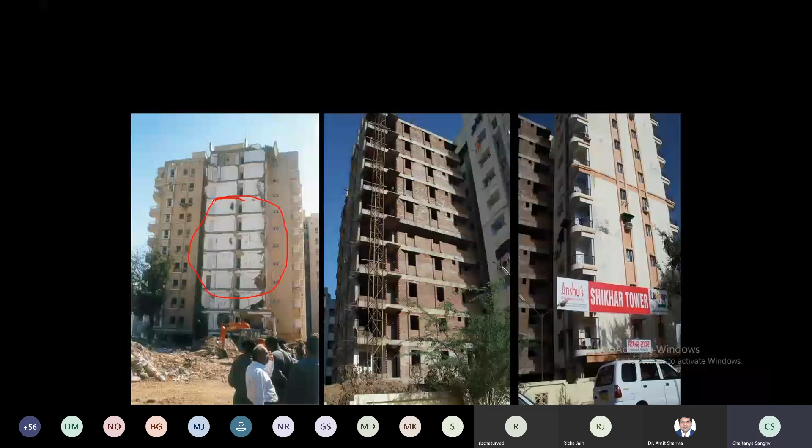These are the L-shaped buildings. Sometimes this is the classical example - the architect says okay, this is my front side, so you cannot put a shear wall on this side. They say stair or lift should be on the rear side. So here the lift is placed. Now the lift is made up of RC wall, so it is too stiff, and this other part is quite flexible. So what is going to happen?

This flexible part will move more during earthquake, and the stiff part will remain as it is, and then we observe the damage. So torsion is going to come - the whole structure will undergo twisting. That's why I'm saying we are not able to handle earthquake force well, and if you add torsion to it, you make your life miserable. So you have to avoid torsion as far as possible.

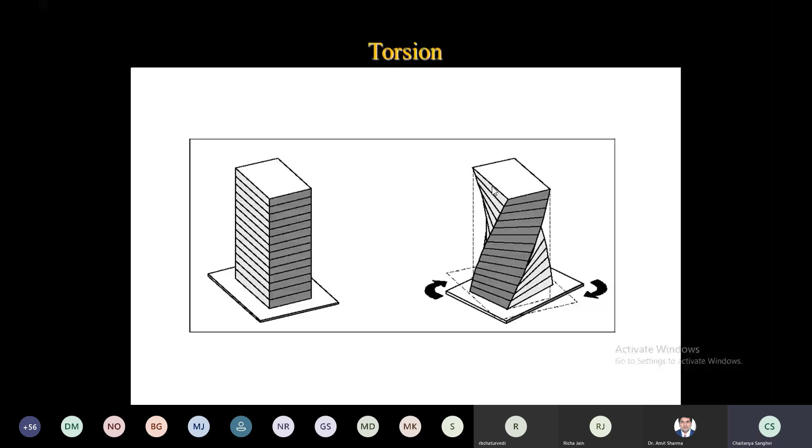You can see these are the failures observed - this is because of the shear building, it collapsed. Here you can see this is the stiffer part, this is the flexible part. Again collapse is observed because of this. Here also the front part was flexible and the shear wall was on the back side, so the front part collapsed - this is what happened.

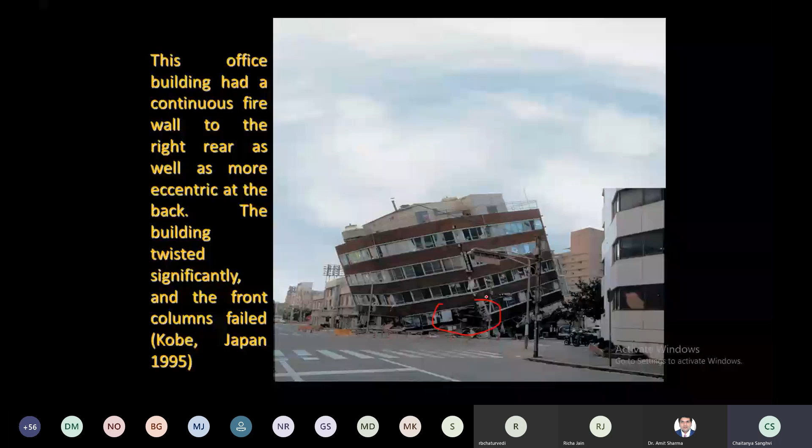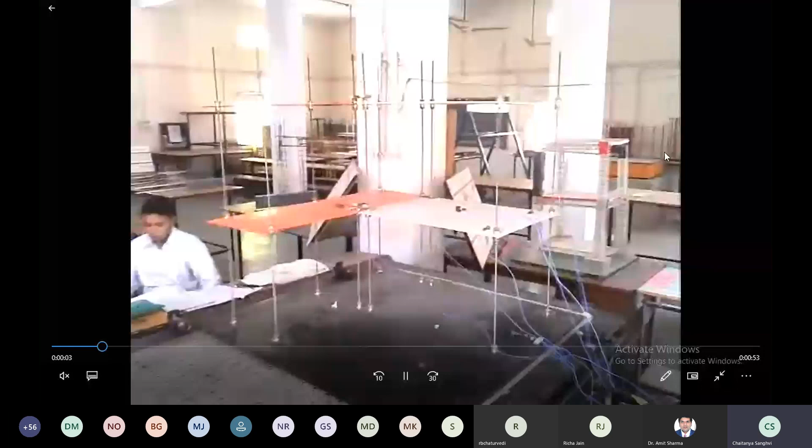And these are the results we have. I'm not going to discuss the result in detail, but I'm interested in the performance. If you look at the performance, look at this - when I connect it here, both are connected. Generally L-shaped buildings have a common structural element, so here it is connected, and now what is happening - just look at the behavior.

You can see instead of just displacement, you have a rotation also - it means torsion is introduced in the system. And when torsion is introduced, your columns are excessively stressed - just look at this. So larger torsion will come, and this results in collapse of the structure. So L-shaped and C-shaped buildings are not performing well during earthquakes, because they generate additional torsion in the system. Look at this - torsion is there? Yes.

And because of torsion, what is happening? You can have the acceleration in all the directions, right?

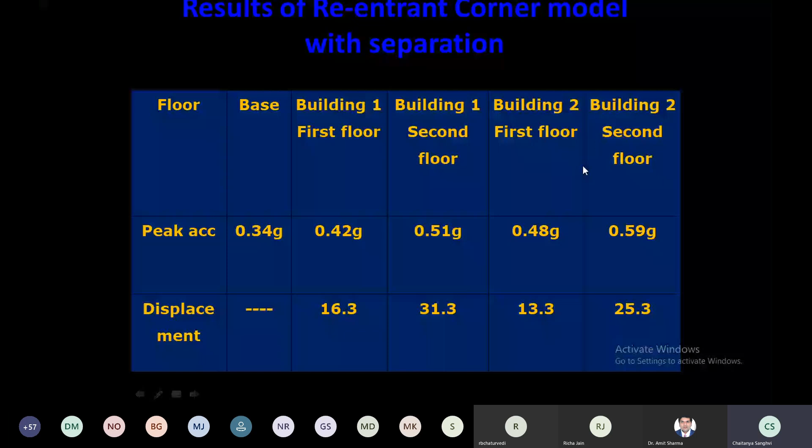Then we have a liquefaction model. What is liquefaction? Liquefaction means when your structure is located on a sandy soil, this is going to happen. We know that soil possesses two things: cohesion and friction. The strength of soil comes from C and phi. Now, when your structure is located on cohesion-less soil, cohesion-less means C is 0, so the strength of soil depends only on friction. Now, sandy soil is a cohesion-less soil, right?

Now, if sandy soil is there, and if the water table is high, during shaking, what happens? Water will come out, and it will fill the space between the soil particles, the sand. So if the space between the sand particles is filled up with water, then there is no friction. If there is no friction, then there is no cohesion and no friction. So your sandy soil with the high water table behaves like a liquid. And if your structure is located on such kind of soil, the structure may tilt.

This is known as soil liquefaction. So what is soil liquefaction? The soil is losing all its shear strength. So therefore, your soil will not support your structure. Simple example: suppose you want to walk on water. What is going to happen? Are you able to walk on water? No. What is the reason? Because water doesn't have shear strength, so you will basically sink in that.

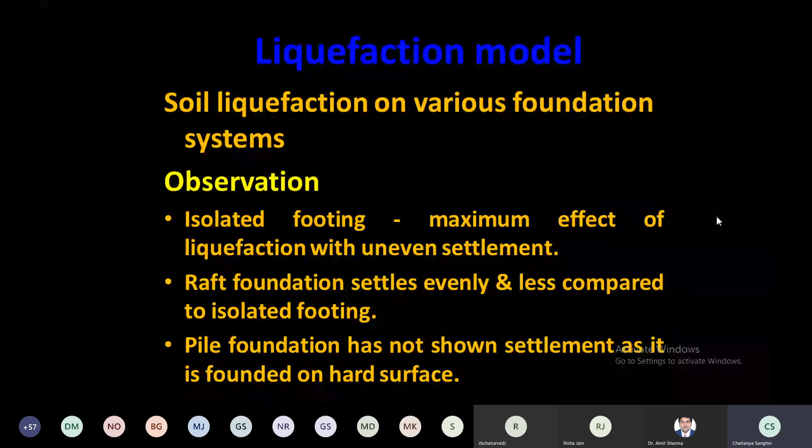Basically, we have prepared a model with the isolated footing, raft foundation, pile foundation. One minute, I think the videos are not right here. I'll show you maybe separately.

And the last important part as far as the model is concerned is the reinforcement detailing. In earthquake design, we go for ductile detailing, which is very important for us because we highly rely on ductility. Suppose if you design your structure for dead load and live load, you can follow IS 456. But if you want to design your structure for earthquake, you have to introduce ductility in your structure.

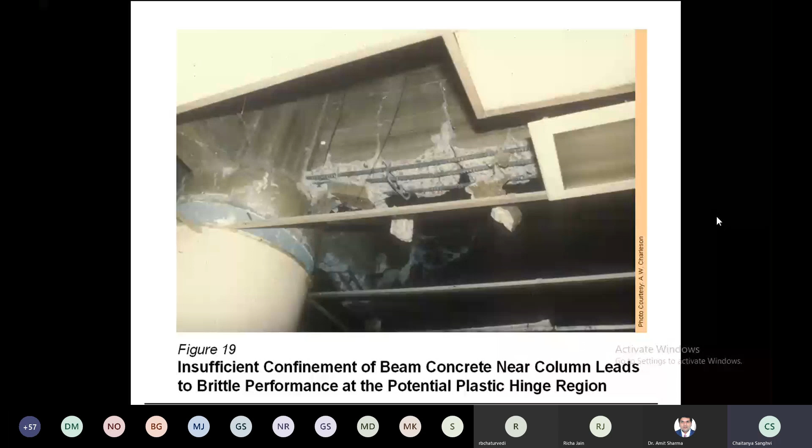And you can see here, these are the failures. This falling of concrete is because of the strong shaking. Here, the shear failure of the beam is observed, because of poor detailing. You can see the detailing.

Now here you can see, we know that plastic hinges are formed at the top and bottom of the column during earthquake, because these are the regions where the highest maximum moment and shear occur. So we can see the second kind of failures here.

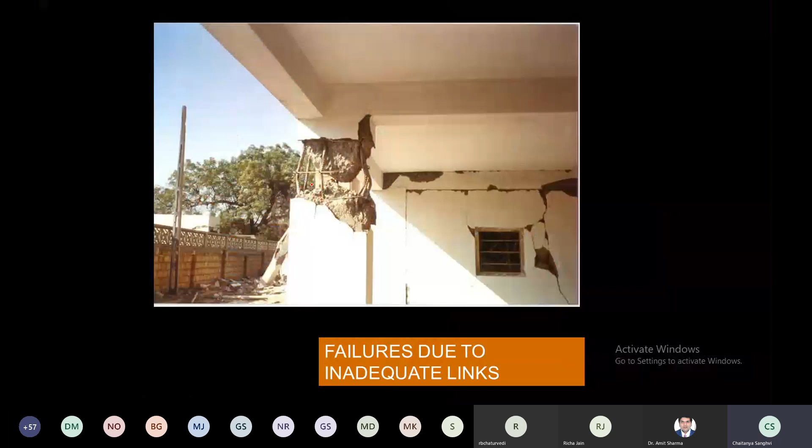This is failing, you can see this is failing, because of poor reinforcement detailing. Here you can see the spacing of the shear stirrup is quite more, meaning quite high. Here you can see the reinforcement detailing — the shear stirrup is not closely spaced as per IS 13920. So you have to be very careful.

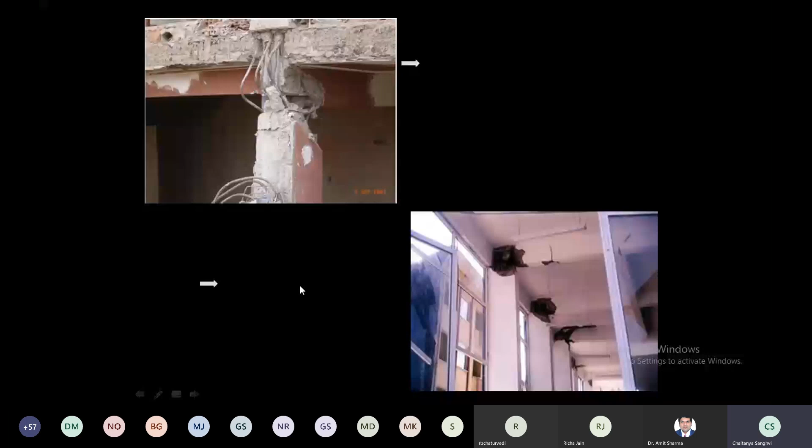Here you can see bulging is taking place, and here you can see the improper detailing, because of inadequate shear stirrups. We know the maximum moment is at top and bottom, so you have to go for closed stirrups at top and bottom — that is required. Otherwise, failure will be observed. Here you can see these are the various pictures you have.

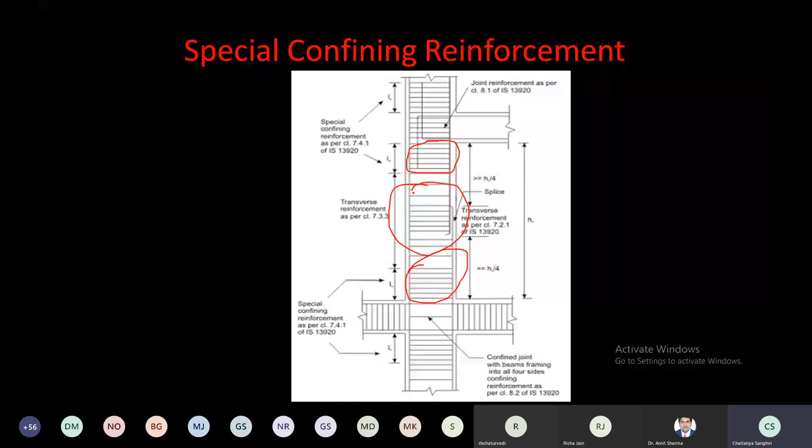So what you need is closed stirrups with a 135-degree bend, and these are placed in opposite directions in subsequent rings. Closed stirrups are required near the joint. You can see here if it is closed. This is a column, with closely spaced stirrups, and lapping is allowed. Lapping of the longitudinal bar is allowed in this portion, but you can lap only 50% of the bar at one point, so closed stirrups have to be provided when lapping is there.

And here this is the extended region. This is the foundation, and then you have to go for the special confining reinforcement here. Otherwise your structure may fail here.

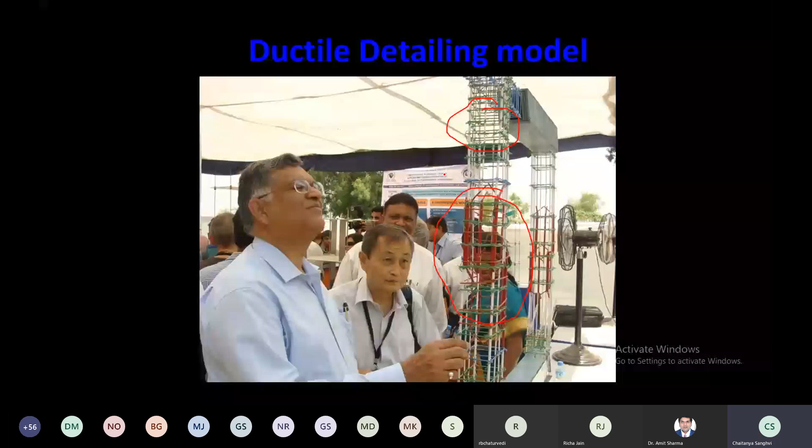Now this is a Japanese engineer. This was demonstrated during the international conference at Gandhinagar. You can see these are well detailed. So this model will show you how you have to carry out the ductile detailing. So these are the models we have.

So finally, we come to the conclusion that the behavior of a simple structural configuration can be understood easily by these experiments. The experiments always give you insight, because when I was studying, my professor was telling me that your structure is going to experience torsion if it's unsymmetrical.

If the professor is saying it, we have to believe in that, but we are not able to visualize it. But when I see that, if torsion is there and when I apply the shaking, then it shakes, and torsion is introduced. So it always comes to my mind that this is going to happen, and it becomes very easy to understand that part. So experiments will give you enough insight.

The result of the experiments are verified by generating the model in software. Basically, don't rely only on experiments or only on your software model. You have to correlate and verify these things, and then the actual boundary condition can be derived by comparing the experimental and analytical values.

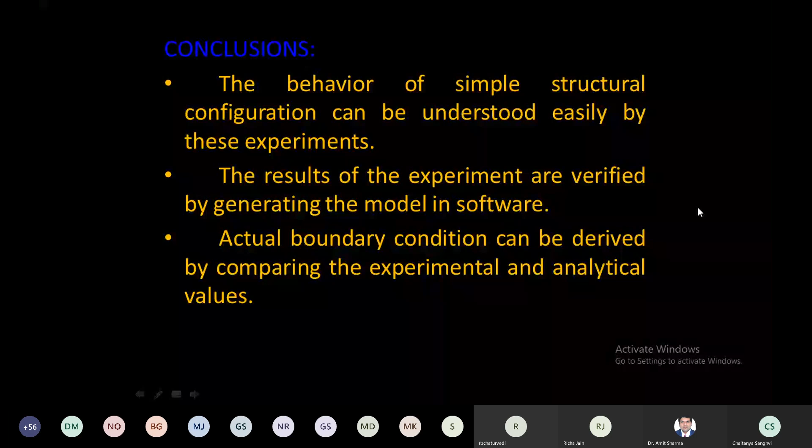So there are many references used, and I think my guide was Dr. H.S. Patil, and everyone has helped me a lot. Professor Murty and Professor Durgesh Rai have frequently visited our lab and given very good input to help us make our lab strong. Even our chief minister at that moment reviewed the whole project.

Right now we are working on vernacular housing, traditional housing systems in our laboratory. We are developing a comprehensive shake table, maybe of size 10 feet by 10 feet, and we are going to take a half-scale model of that. So it is under process.